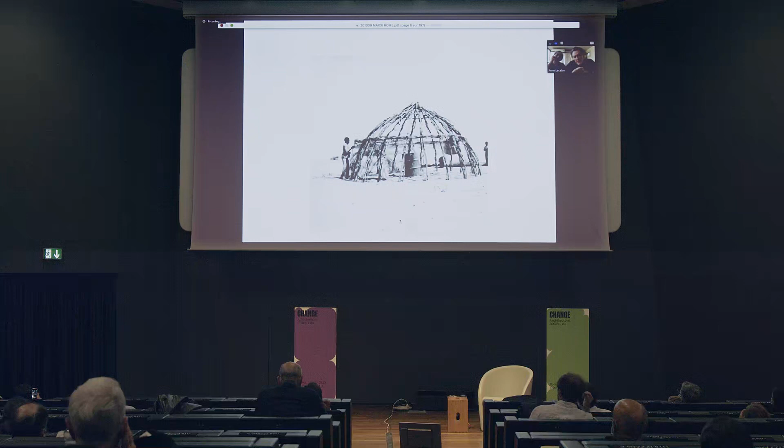I have in mind when I was in Africa, my first house, and then it was just planting some branches in the sand, bending them to make the form, covering the vertical part with a certain kind of straw, and then completing it around these branches, placing another kind of straw on the roof in order to avoid the rain going in during the rain season. And then the project was a sort of straw hut with a little door to go inside, with a fence around, and a sort of hangar with 9 branches in the sand and a roof on top of it. So this was the first house in Africa.

It was in 1985. And for me, this idea to work with the village close to the place and to build this space in 3 days, it was this idea of a sort of maximum pleasure with a minimum effort, with minimum materials. But this is also, if we are really attached to the idea of modernity, the same approach we find in the Case Study House program, these housing programs of the 50s in the US, that were also using as little material as possible and just confronting it to the relief, to the landscape, to produce some of the most beautiful villas of the West Coast in the US.

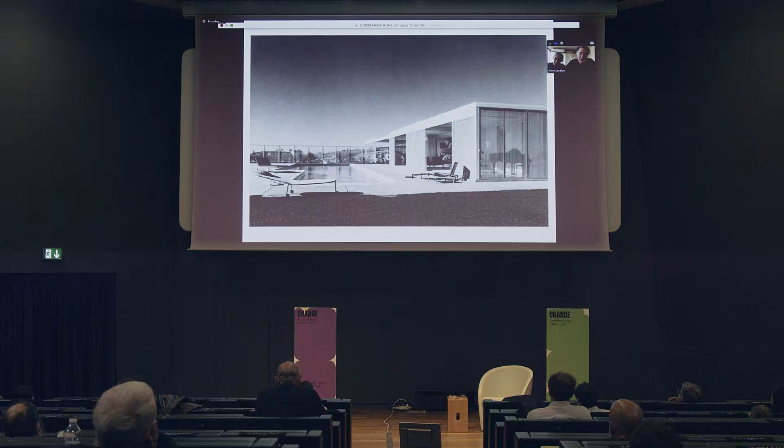So this idea of extreme simplicity proposes some qualities and modernity. But it is also a sort of modernity that is linked with very simple gestures. I also have in mind the sliding panels of the Villa Katsura in Japan that are at the same time extremely ancient, but also extremely modern. And we want to work with these elements to propose pleasure, to propose quality. So to build simply means to come back to elements.

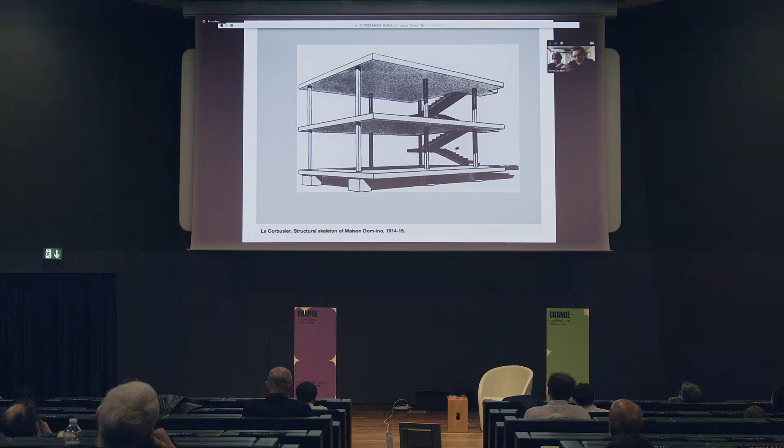It is about making grounds, making floors like grounds. For us, the example of Maison Dom-ino is still important. It is how we can deal with columns, beams, and floors to produce a system with a stair that allows you to go from ground floor to first floor and then to the roof. And there is no wall. We really fight against walls. Today there are walls everywhere. Walls at the borders, walls everywhere. It's a sort of constraint by walls, and we want to open the space. So for us, it is a minimum necessary, a sort of skeleton that is able to produce ground.

And then with this organization of grounds, we have to deal with this question of air, light, climate, and we think it's important to play with climate and not to fight against it. Today, everything is defined to fight against the climate, and we want to work with the climate and to filter the climate, to work with it, to play with it instead of fighting against it.

And for us, a very interesting reference can be the greenhouses of the 19th century, the botanical gardens, but it can also be the horticultural systems developed for salads, tomatoes, etc., where with extremely simple systems, just by natural ventilation, by filtering, by letting the air come inside and go up, we can work with the sun, take the warmth of the sun, filter when there is too much sun, make it totally dark if we want to make it dark, but work with this kind of generosity of the climate instead of fighting against it. And just adapt below these systems the possibility of inhabiting.

So by working on the ground and working with the climate, I think it's nearly enough. It's nearly enough to produce some spaces that are interesting to inhabit and to create beautiful views from inside to outside.

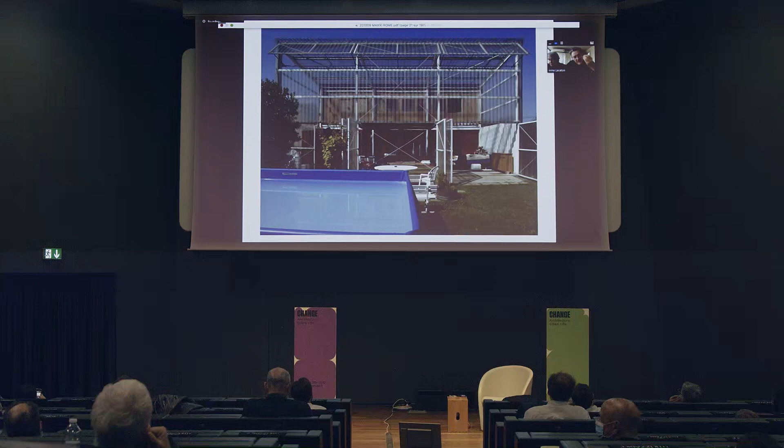And on their side, they never said we like this architecture or not this architecture. They just said do what you want as architects, and we will do what we want as inhabitants. That was so clear that for us it is always in our mind.

And then we see that the greenhouse that we imagined would be filled with palm trees or tropical flowers was in fact much better when they used it by placing all their furniture inside. And it's also interesting to see that the greenhouse placed on the east is probably the space where they spend the longest time in their day with all the family. So the space that is considered as no good for inhabitation is finally the one that is used the most.

So with all the furniture that they placed inside, that produces a very interesting situation, and the view from the street, where we can see that the facade is not something that is always the same all the time, but can change as a function of the seasons, of the mood of the inhabitants, of any situation.

So a dwelling must offer the inhabitant opportunities to move around. It means that we look for more fluidity, more mobility, not to be blocked at the end of a bedroom, but to be able to go through the passage to a balcony, to turn around. This idea of extending mobility to create more freedom of use is very important. All rooms then have large doors opening to the outside. Facility of moving inside or outside, as in a house on one level.

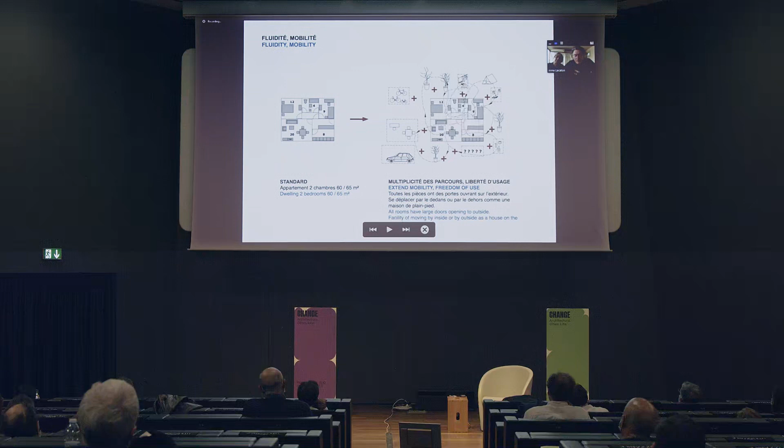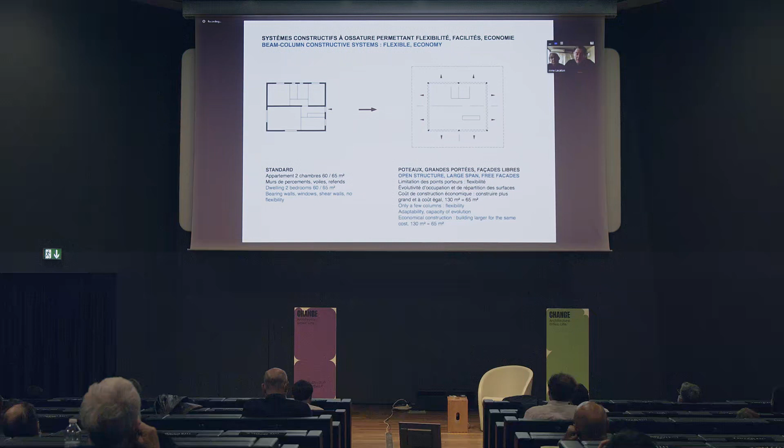It means also building larger, twice more, building double with the same cost as a standard dwelling, to be affordable for everyone. So then we come back to this idea of a beam-column constructive system that allows flexibility and economy. So no walls like the black walls on the drawing on the left, but an open system with columns and beams and floors that will offer more capacity, more possibility of adaptability, capacity of evolution, and also affordability.

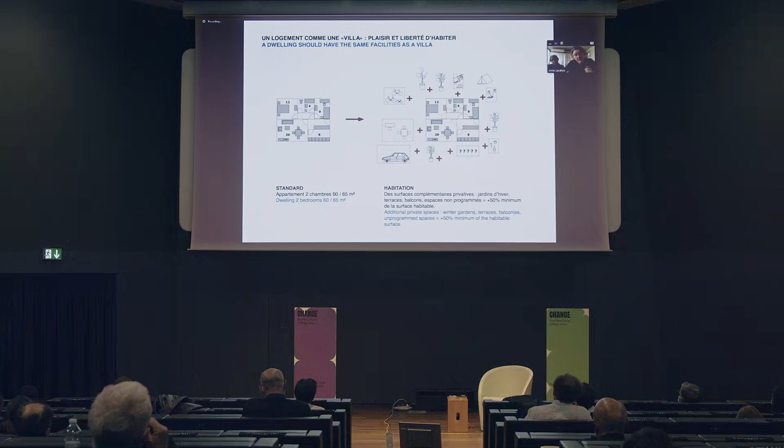So it means that with these systems, by developing floors, by developing climates, it is possible to invent a situation of villa, even inside the cities. Inside the city, it's no more flats or apartments, it is a villa at every level. Our aim is then to redevelop in the cities this concept of villa, houses with gardens. Instead of being outside the city in peripheral situations, we believe that it is possible inside the cities to have the same system as a villa. The idea of luxury is therefore redefined in terms of generosity, freedom of use, and pleasure.

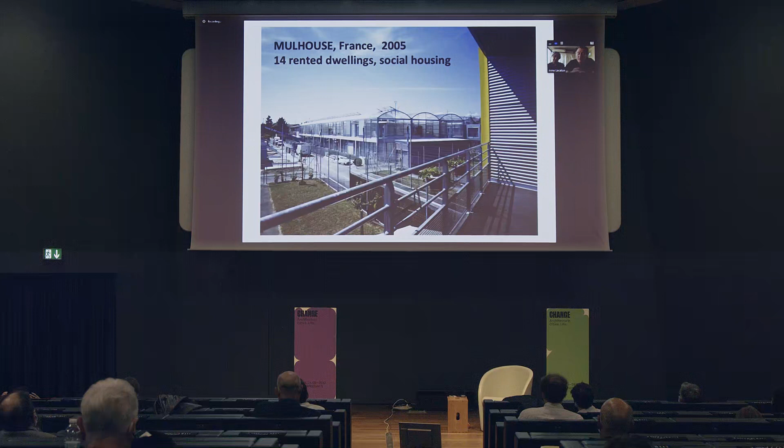The project of Mulhouse, a collective social housing project, was very interesting because the challenge of the client, a social housing company, was to say, after 20 years of making the same standard, I want to try to develop some new situations. And they created a project called Cité Manifeste. That was a sort of blank card: I have a very strict budget, the budget that I have as usual, but you can invent something different. And we were with four other colleagues, Jean Nouvel, Shigeru Ban, Mathieu Poitevin, Duncan Lewis, and we made the project.

On each plot, each team has to work with 12 apartments. What we tried to propose is to densify the system, and we say instead of 12 flats, we will work on 14 flats, 2 more, but these flats will be much bigger than the standard ones. So it is interesting for us to develop this idea to waste less ground by making more flats, but at the same time these flats should be 2 or 3 times bigger than the standard.

And what was important in the discussions we had with our clients was: okay, but if you make a flat that is 2 or 3 times bigger than the standard, how will I rent it? It will be too expensive. And we said, it makes sense at one moment to say a flat could be rented in function of its cost. This is a normal procedure between 2 people. Okay, I build this, the cost of the construction is that, and then I rent in function of that.

And the client agreed. So it was possible then to make flats that were 2 or 3 times bigger than the standards, but the rent could stay the same for the inhabitants. That was very, very important for us. And you can see here the system, which was in fact just making grounds with a sort of skeleton of concrete, creating a sort of table. And on top of this table, it was possible to place a sort of professional greenhouse that was giving the climatic conditions for living inside.

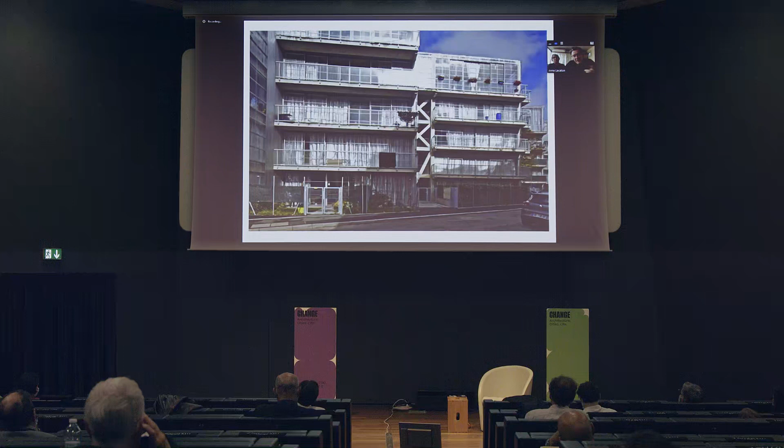With the same client, 15 years later, it was exactly the same question that was asked again. And in another part of the same city, it was possible in a denser situation to create the same kind of apartments, like you see here, with winter gardens, with curtains, filters for the light, that would offer the same qualities of living, of moving, of freedom, and relation between inside and outside.

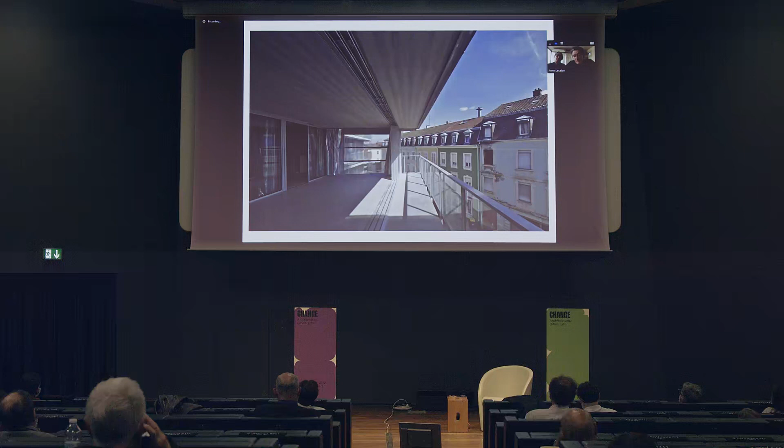For us, it is very important. This idea that you are in the city, you enter your flat, you close the door, and then you go to the window, you go to the winter garden, and you see the landscape again, you see the sky again, and you see the place where you were walking 5 minutes before. This idea of the possibility of escaping is for us absolutely essential in any project that we work on.

To build with is to say that we have to take into account the existing situations. Most of the time, perhaps 50%, 60%, or sometimes even 90% of the rich elements are already there. Like here in Cap Ferret, close to the Bassin d'Arcachon, with this fantastic view on this lake close to the ocean, where the challenge was to build a house without cutting the trees, without erasing the sand dune, just placing it in the landscape and in the situation.

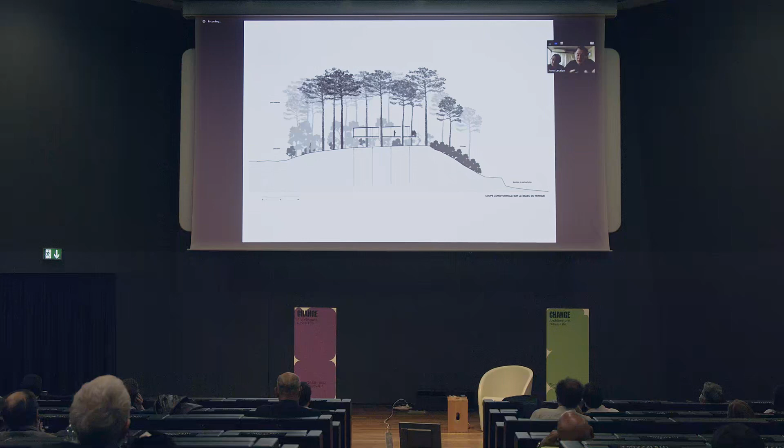So you can see what we add to a situation of the sand dune, of the pine trees growing, and then this mixing of structures between the steel structure and the wooden structure of the forest, all together creating a situation, also taking care of the light coming from the lake by reflection, and giving this possibility to live with these precise situations between the trees, the trunks crossing the house, giving the feeling that you are part of the forest.

So it means building with what exists, taking care of each root, taking care of each branch, and being extremely careful with all of them to produce the situations where you can stop for a while in your armchair and just look at that situation. So building with is extremely important for us.

We really believe in modern architecture, but at the same time, contrary to the modern movement, which very often made a sort of tabula rasa, we really want to work with the existing, to be extremely delicate and precise with what exists already and take it into consideration. And it can be for any situation. It can be in a very beautiful place like the one we saw before, but it can also be in places that people don't like or want to demolish.

And here again, I think it's very important to go precisely inside the apartments, to know the situation, to work with the people, with the climate, with the trees, with everything that is already there, with economy, to do more with less. Because in France, for more than 15 years, there has been a sort of national policy that says that these blocks have to be demolished.

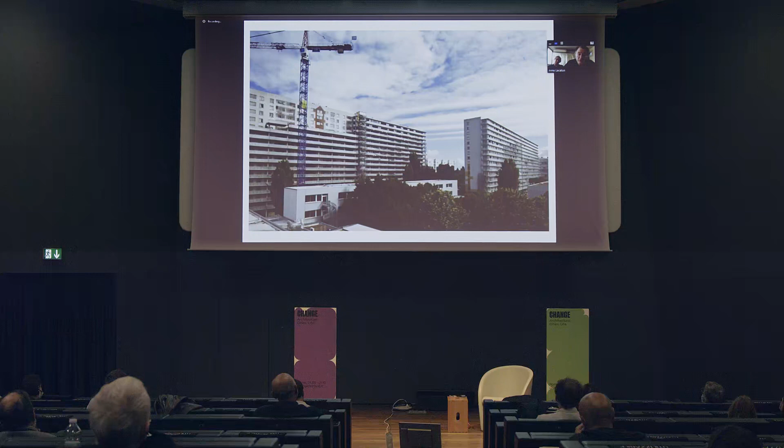And the addition on the facade: to keep everything that is inside and to add these new winter gardens 4 meters deep in front of each flat in order to give this extra space to every family, as it is when it is finished. But more in detail, the process of transformation. So it was like that, with extremely small balconies, and not for all apartments, with these strange colors on the facade. And you can see here the transformation.

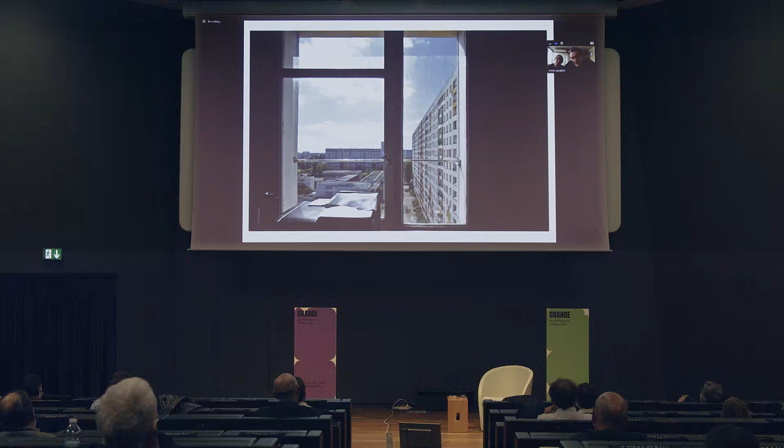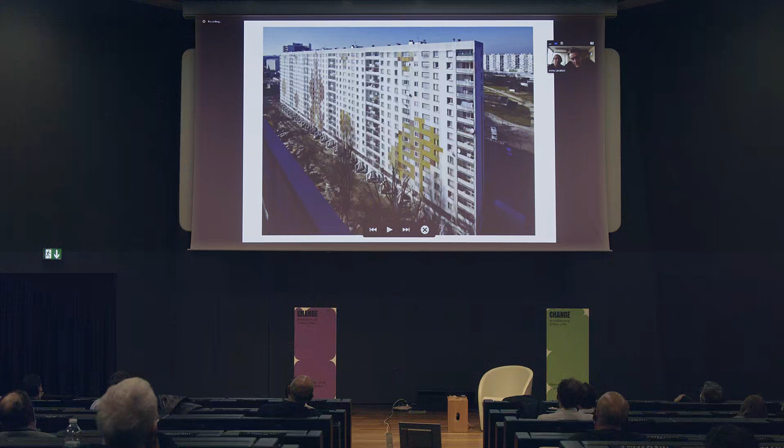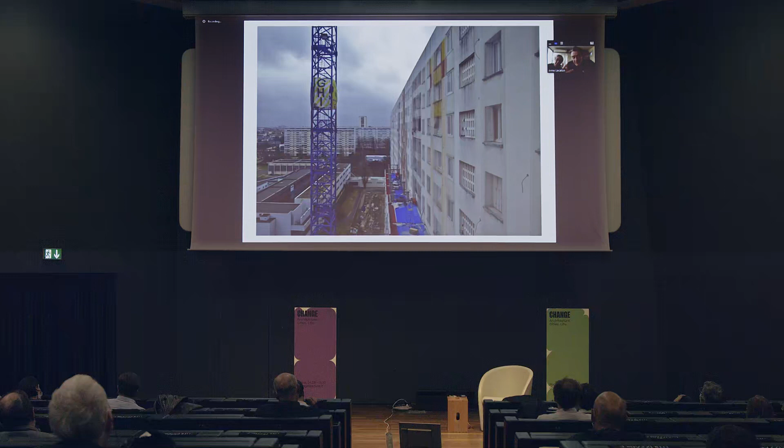So here it was one flat looking at the facade of the next one. Here we can see the building before transformation. We can just see on the lower part the beginning of the foundations, the columns supported by foundations. Then these prefabricated elements were lifted in front of the facade. All these facades were placed in front of the apartments, while at the same time all the inhabitants could stay inside, because none of them wanted to leave even for one night.

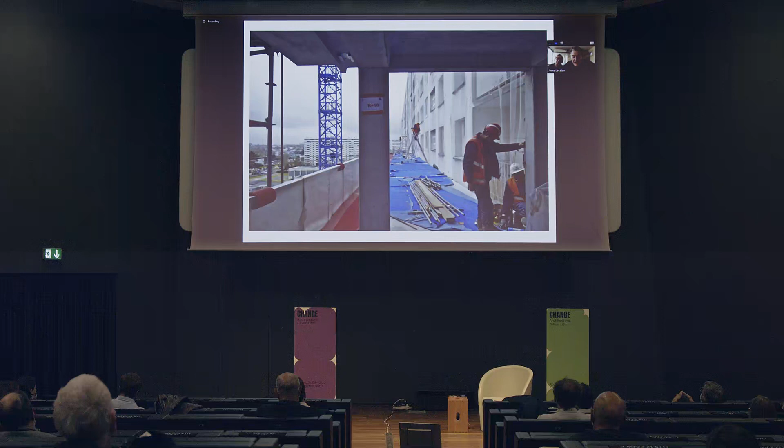And then step by step, with their own foundation, they were fixed on the facade just for stabilization. Then new columns, like a sort of very large scaffolding that will be a definitive scaffolding, a definitive structure, placed in front of the facades, the old balcony as it is from outside with the new structure that has been placed in front.

Inside the apartment, the inhabitant was still there, and we just placed this wall with openings, circle openings, for 2 days, just to prevent some dust and some asbestos that was in the joints of the windows. On the other side, the workers were opening the window and transforming a window into a large passage,

taking away the blocks of concrete, making the passage, taking away the box, finding the space of the apartment behind, placing new window frames and new transparency, and then the possibility for the inhabitants to see and to live in the transformed apartment with new qualities, with new freedom, with new possibilities.

And it is incredible to see that after 2 or 3 days, immediately new furniture, new light, new plants were able to be placed there. So it gives this kind of climatic insulation, this kind of temperate climatic situation that also gives the possibility to have a very, very low energy consumption and economy of energy. At the same time as these works with the new winter gardens, we have new electricity, new bathrooms, and new elevators to totally transform the building and give it the conditions for a very interesting new space.

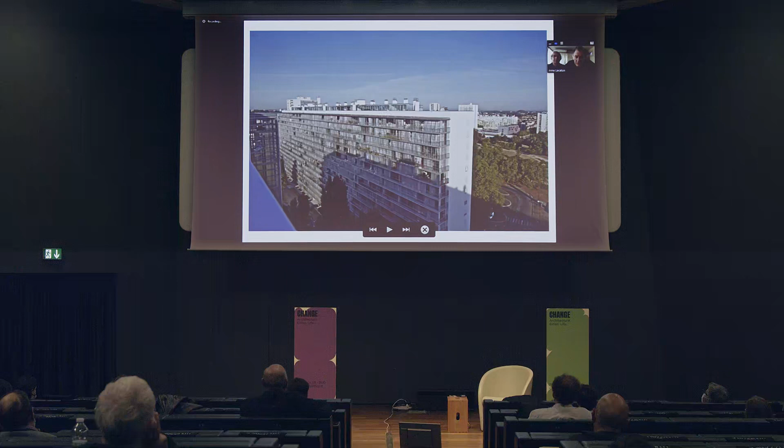So you can see some images from outside, and finally, all this transformation from inside creates a new image from the outside. It was also possible on top of this building, above the 15th, at the 16th level, to place new flats, like case study flats on top of the roof, that were creating a new situation for new inhabitants. And here you see the situation where some new families could have a sort of fantastic view towards Bordeaux, towards the city. Case studies on top of social housing, but also social housing flats there.

It is this research of light, this research of simplicity, this research of working with existing situations that is for us so important. So the project was done with no rent increase, with people staying in their flats, and by spending 2 times less money than situations where we would have demolished and rebuilt the building. I will let Anne continue on the next project.

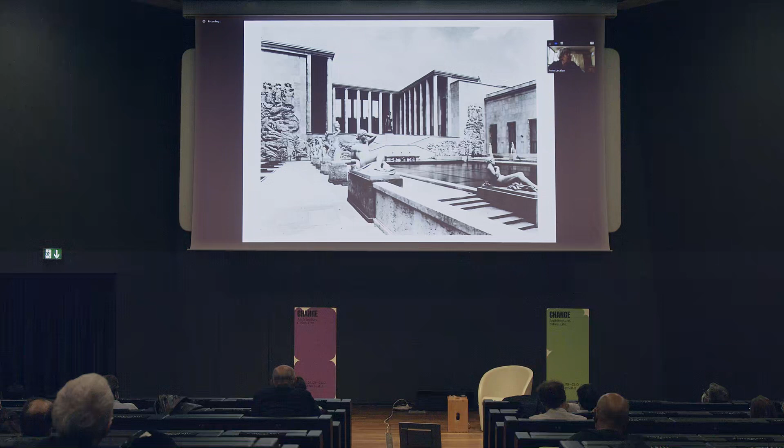So again, it's the project that we mentioned before, the Palais de Tokyo in Paris, and this is the original project built in 1937 for the Universal Exhibition. And this project was two museums at the origin. It was not a pavilion, but a commission shared between the city of Paris and the state, to make a contemporary art museum. But the wing of the state knew a more chaotic history, and in the early 90s, that was the situation inside after some works of demolition and the project which was abandoned, and we were invited to apply for a competition to do this project for a temporary metamorphosis to introduce there a contemporary art center for young creation.

So that was the situation that we found, which was absolutely fascinating, to see the space and the quality of light, and how the architects did this great work of making various spaces with always the light coming inside in a different way, sometimes from the roof, sometimes from large windows, very long perspectives. But in a way, this situation was never seen by anyone, because the inside was much partitioned to have the different rooms for exhibition. So this was at the same time very impressive, because all this appeared very weak, very fragile, all these light structures.

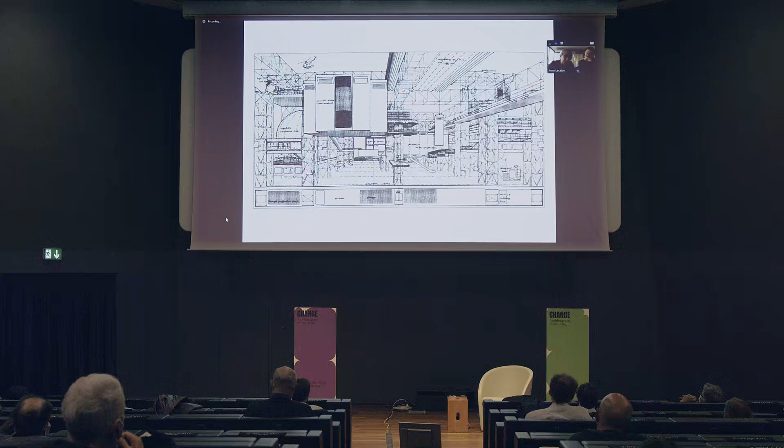And this idea of flexibility, to provide a state which allows all situations and the possibility to occupy the space, but always to return to the situation that gives the maximum freedom. So, and it's what we did. We just cleaned a little bit.

We reintroduced the electricity system, heating system, elevator, staircase, fire security, all that had been destroyed and that was missing, to reopen this space in good condition. And it was done in a first stage, and in the second stage more recently. So now this space offers

16,000 square meters for exhibition, plus another something like 18,000 for offices, workshops, but also the atelier for the curatorial team. But all these pictures come from a series of exhibitions that happened since 2002, that was the reopening, and show how it allows many different situations of various artists,

but the space doesn't create constraints, but always gives the opportunity to define the specific environment of every exhibition expected or wished by the artist. Here it was an exhibition from Thomas Hirschhorn, which filled the space with all the tires.

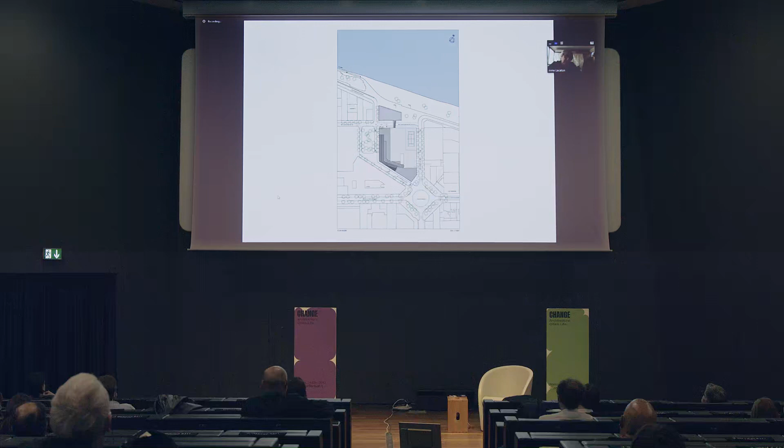So here we decided to use 100% of the right of building. That means much bigger than the program expected, twice bigger. And in fact, the program has the same amount of extra space to allow this quality of appropriation and use. So the building is very simple.

It's a huge structure made with a series of columns and floors with a high potential to load on them, 10 meters by 10 meters. This is a grid. And also the height and the ceiling: the idea is not to create floors, but grounds. And it's why the height between every ground is quite high, because of the idea to rebuild on this ground.

So the principle is to create many ground floors, which allows using the structure in different ways, but also to create the conditions of the transformation and the reuse in the future.

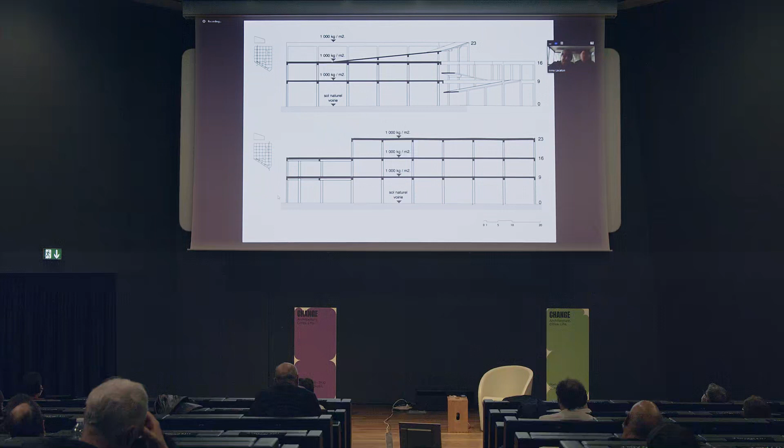So here, this is the kind of skeleton with 4 levels, and the ramp, like you see here, is running along the long sides to lead very smoothly to every floor by walking, by bike. But also, if necessary, with a car or truck to bring materials

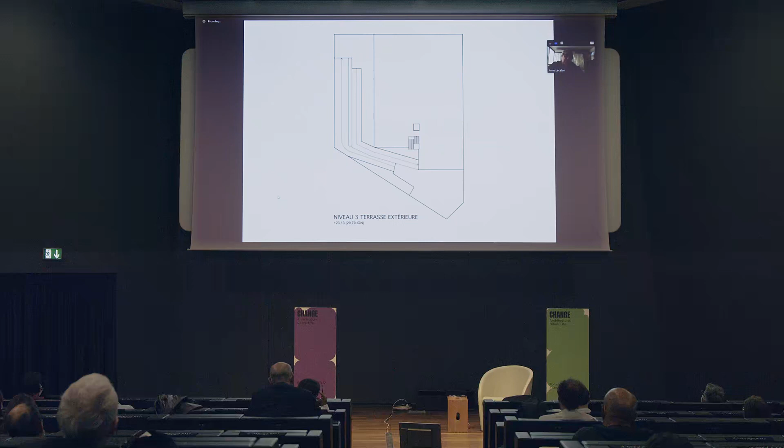on these big platforms. So this prefabricated structure allows us to provide this huge space at a quite economical cost, and make this extra space affordable in the former budget.

So the standard prefabricated elements allowed also to build fast, to build clean, because all the products came from the factory and they are just placed in the construction. And this is an intermediate state where the structure offers this maximum potential, so that we can imagine that it's ready for many possible uses. So the first occupation is a school of architecture, but we can imagine that later it could become something else.

And today it's something very important to also think the condition of the transformation of the buildings later. So the structure that we provided, and inside the structure, what you see in red, it's intermediate floors, which are light floors built on the structure without any need of reinforcement of structure, neither foundations. And this is a program of the School of Architecture.

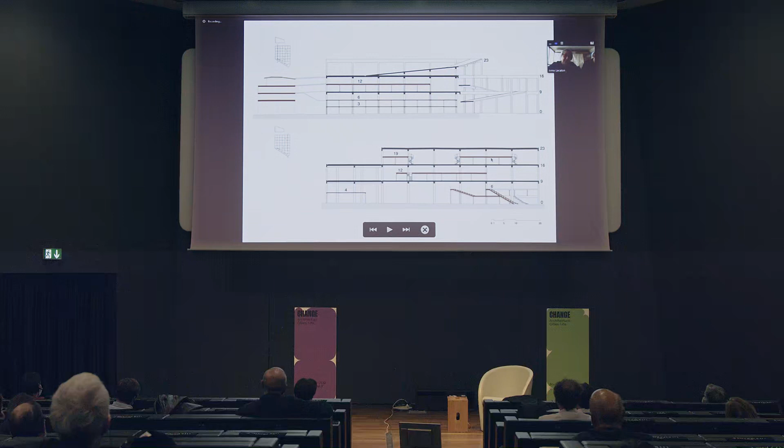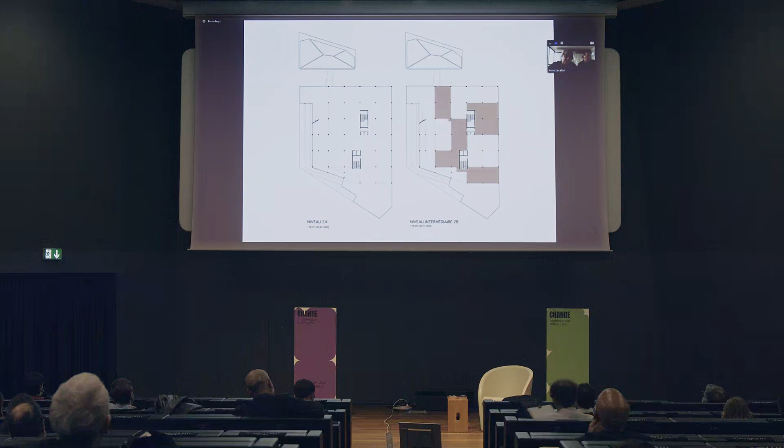But this can be also deconstructed or removed or changed for another function, or to change the way the school is used. So as you see here from the left, it's the structure, the platforms, and on the right, it's the occupation by this light structure for the functions of the School of Architecture. But the white remains also for the use of the students and the professors.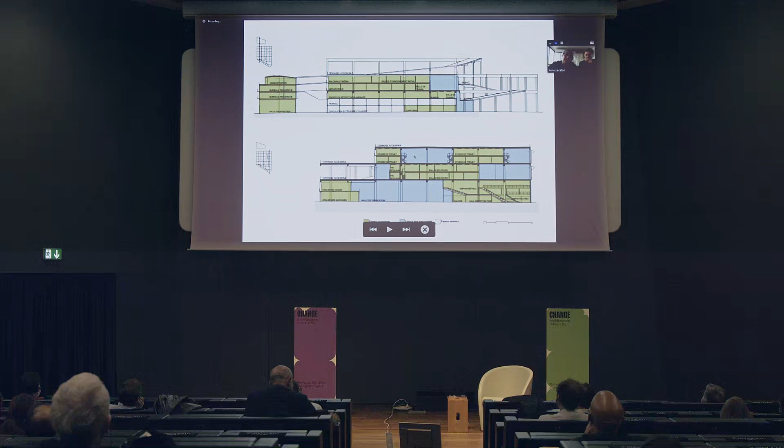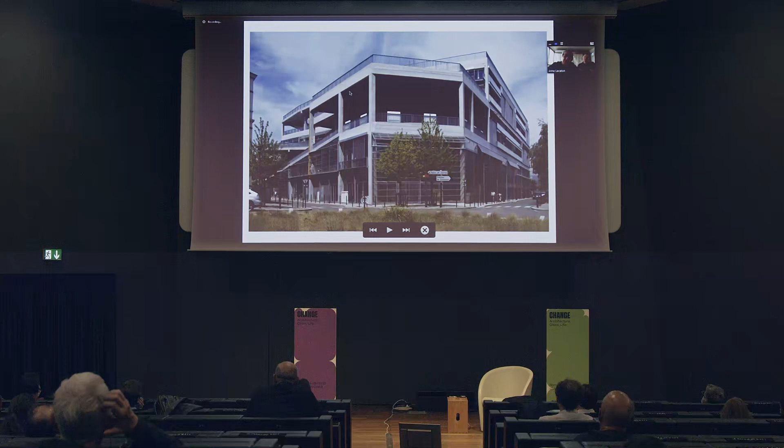So the ground floor is 9 meters in the ceiling, and the other floors are 7 meters in the ceiling. Then the ramp is running all along the long sides to lead to every space. So the ground floor is widely openable to communicate with the public space, to expand the potential of use. Here it's the big atelier for building models, which is directly connected to the street.

So it's possible to come with lorries and bring material, or to build large structures, or also organize events, concerts, which are today organized by the 16 associations of students who always propose events or interventions like a fashion week or dance festival or anything. So the auditorium is open on the square, and it creates also, in addition to the education space, a space for shows or for theaters or lectures.

And this extra space, like here, which is not a classroom, is open to the use, but also it must be negotiated between all the users how to use it, and when it's used, to return to the position which allows the maximum potential. So it's open to the city. The students make many different uses.

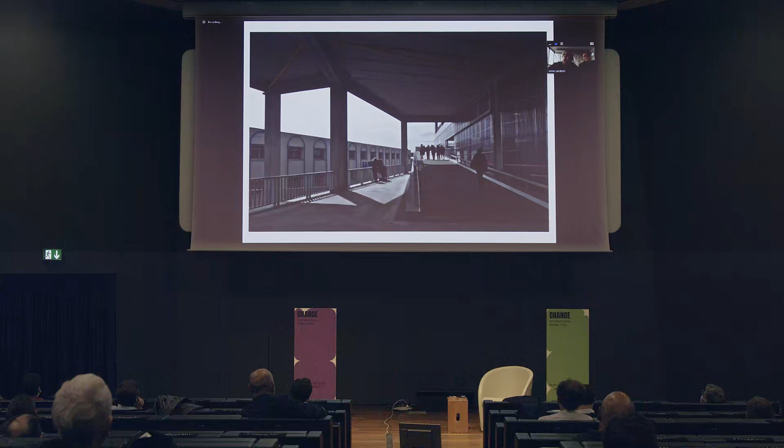And this ramp is also public, which means that it can be used also by the public to go to the roof. So the full use for workshops or festivals or sport, in addition to the basic education. So this is one studio of design project, but all these terraces generated by the ramp are also the place for appropriation. So this principle of platforms of grounds is for us very important, because it brings another dimension to the space, which is more than a building.

And the roof is also potentially a square where a lot of events can happen, like here, outdoor cinema during the summer. All of this is organized by the students in the framework of their course or their studies. And this is also the opportunity for the school to welcome outdoor activities and to participate also in the city.